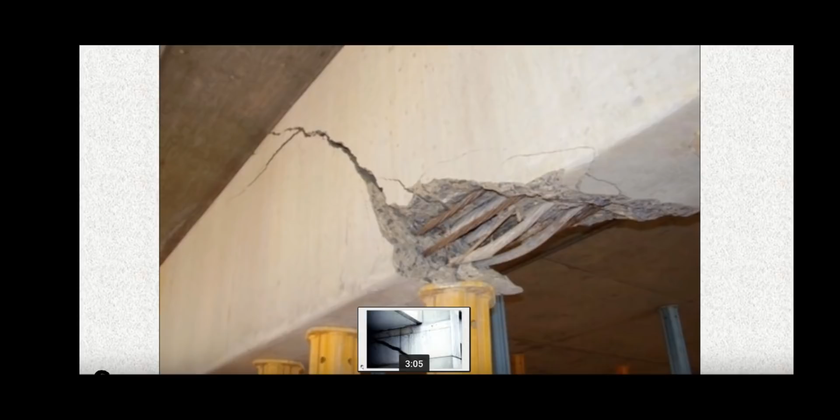I'm going to go forward a little bit. Look how beautiful this image is. Now, does this not look like, if you just pretend this is a load on top of the bridge, this would be the truss system of the FIU bridge, and this is solid, obviously. And this would be the pier, and this would be the 12 column, and that would be the 11 going here, and the rest. I'm sorry, the rest of the I-beam design, as they refer to it.

But you see where it breaks right here, falling away down, not pushing it off. Shear failure is in this plane. It could be in that plane if somebody was to push it back and this could not move. It would have to shear against these 2 members; they would be the shearing members at that point. So you can see it break away. This would be where it breaks away the deck.

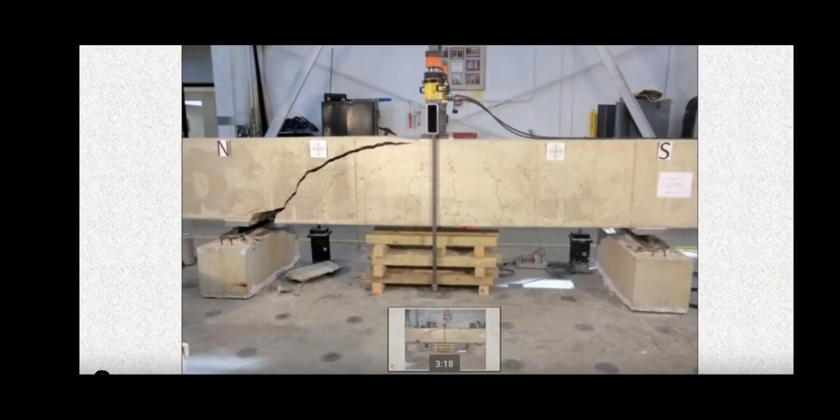Let's see if I can jump to the video. So he does a video here. Back it up. No video, just a shot. Here's his point loads. If this is the dead load of the structure, the bridge, and cribbing is here to help him pick this up after this fails. You don't want it on the floor to try to get it up. So this is just to limit the falling of this beam. Again, there's your load point here, and this would be the dead load of the structure, in this case the bridge, resisted by the pre- and post-tensioning of the cabling and some steel, minimum steel.

Everybody talks about it needs more steel, needs more steel. There is no room for more steel, is there? It's like a 1 foot thick deck. There is no more steel allotment. You can't have giant stirrups in there all the way up because of the way it's shaped. You can't get the stirrups up there. I think he has a stirrups video. Let me show you guys stirrups.

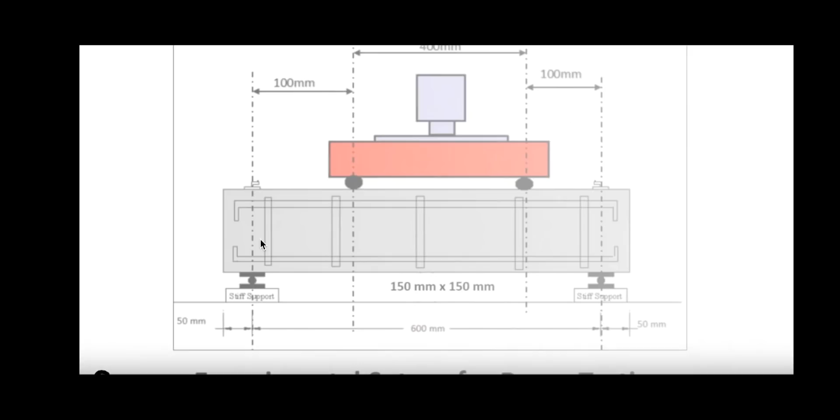Experiment setup for beam testing is what it says down below. You guys cannot see it; my screen recording is not large enough. So 100 millimeters, 400 millimeters, 100 millimeters. So it's not a big beam, but these are the stirrups. It would act like a stirrup if it was connected. Kind of cool. Check it out. Let me fast forward it. Experimental setup for beam testing. All right.

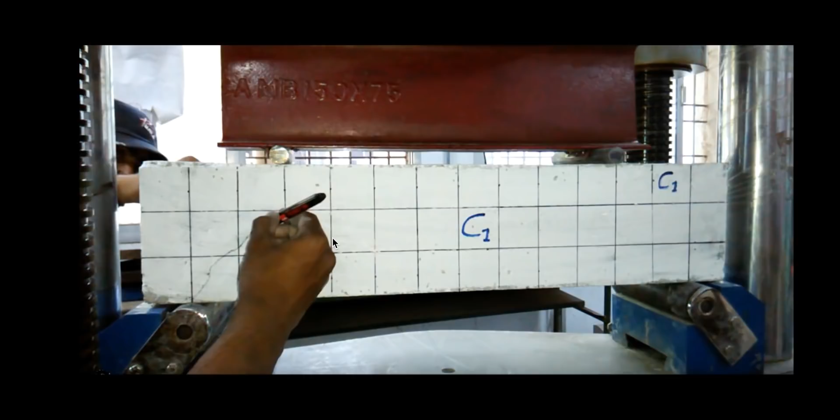So C1. They're going to mark the cracks right now. But what I want you to note, and I've been working on this very hard, diligently in the real world, finding locations before I do a video, but I'll give you a gist of it, is that when a structure is failing from shear, this is already a shear crack, it doesn't exhibit itself at the top that easily. This still looks pretty much in plane up top.

You'll see the cracks, which I really like his video doing this. It's the only one I could find doing this. You see it doesn't go all the way to the top, so you don't see it. That's that inverted V I talked to you guys about. If you can imagine it, this would be the open of the V, and that would be the point of the V. But look where it resolves itself. Right about there is where it transfers the load, and the stress expresses itself in the crack up to there.

And over on this side, it's like this. But it's a 45. See the 45? Remember I talked to you guys about loads, how they transfer on 45s. Well, I haven't found anybody talk about this in papers or anything else. But you see the 45, and you'll see that now, since this cracked first, all bets are off.

The load is now, once you have this crack, now the loads are transferring differently in this structure. So over here, if you were looking at the structure, you see these two and you go, huh, might be failing flexurally and not under shear if it was more in center line. But you might be thrown by it.

You don't see the cracks coming out this way because on this end of the structure it's already cracked first, and now the forces are redistributed differently and exhibiting in this format, as awesomely he shows with his penning.

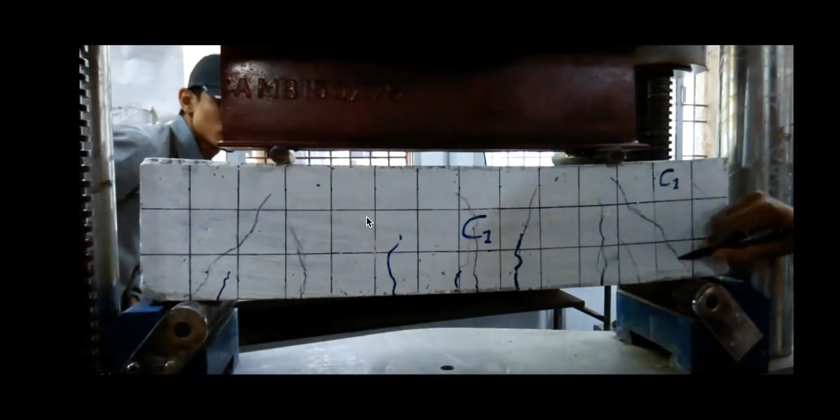And now the flexural part of this member is keeping this thing together. I would theorize that if he didn't have reinforcement across here, this would have already popped. This would already be on the ground. But look how far we got. This one looks like it went up a bit. Look how far we've gotten already, and it doesn't show it at the top.

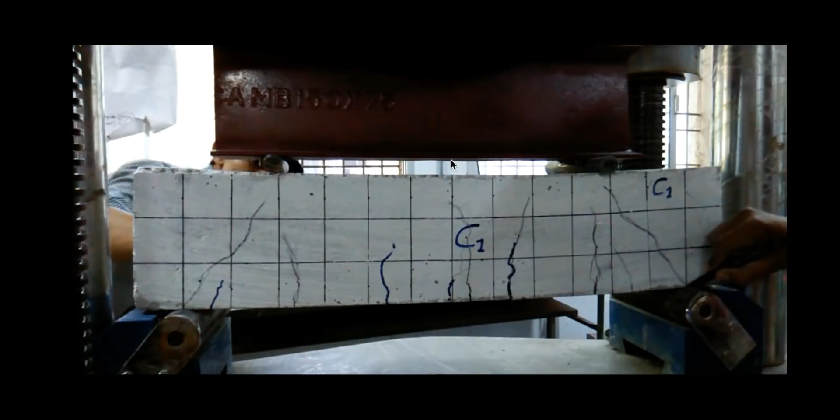It does show bending, but not all the way through. Now here we're coming just about to the top. It looks like we made the top over here. Interesting, the loads, I guess, no longer migrate down there. It found another path that went on the outside. That's interesting, but still approximately 45.

Now we look at this one, and you see it's developed further up. And what does it look like? Now it looks back like a shear again, back to 45. So you see how elusive it could be, but this one developed first. Once those forces are shown and they start developing, it's this far before you finally see the balance of the one to the left and the one to the right, what I'm calling shear force development. And here's your flexural development in the middle.

I love this stuff. And out here, we've got nothing. We've got some compression going on, some outward compression. It's now freed, though. What's holding it now is the steel. It could be some tension out here. I don't know what the steel looks like out here.

But what would stop it is the stirrups. Imagine that the stirrups are in line with this marker here, stopping it from pulling away, blowing out, because the reinforcement is now in tension in the diagonal format. Now we don't have diagonal format to protect it in a structure such as FIU, short of number 11 where we've got the post-tension bar to help it in that capacity. But it's not solid as this member is, where you get to pick any location.

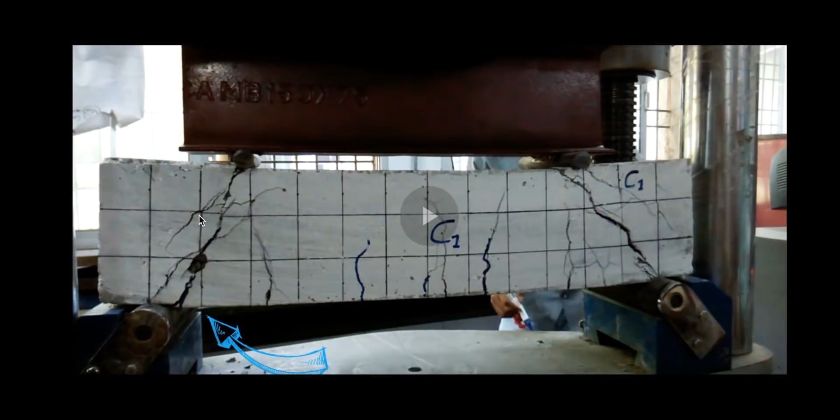And now we're getting it bowing out, bubbling out, expanding forward. But we're now no longer in plane. Just like the FIU bridge, where you can stick a tape measure behind it, now in the other direction, though. Just like that, we're starting to get that. Here we go. Here. Way beyond where it was in plane before.

And it's shooting out again. We're no longer in alignment. And you're getting your pieces breaking out. They're just no longer being able to hold on the reinforcement in there. I'd love to be able to see it. Maybe it's in there. Maybe it's right there too.

But now it's pushing down. The reinforcement is just pushing down on this, what's left of this concrete. Stirrups in here, I don't know. They would tie back up into there then and redirect, come back around full circle, if you will. That was

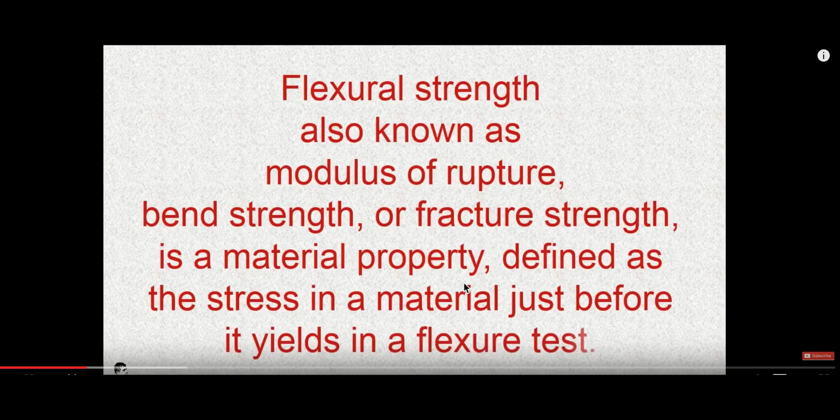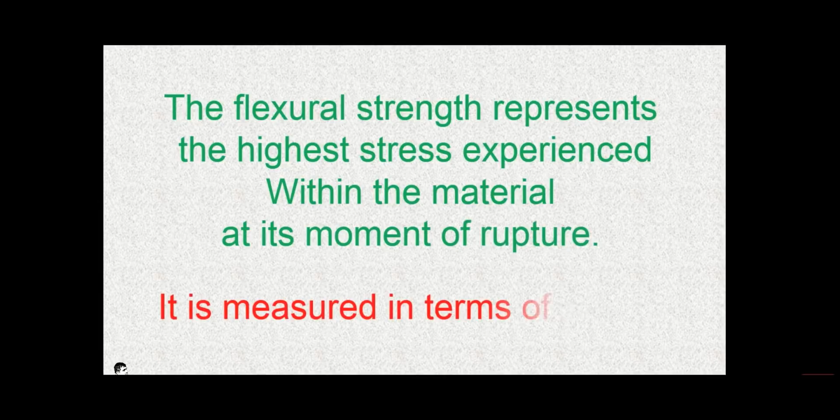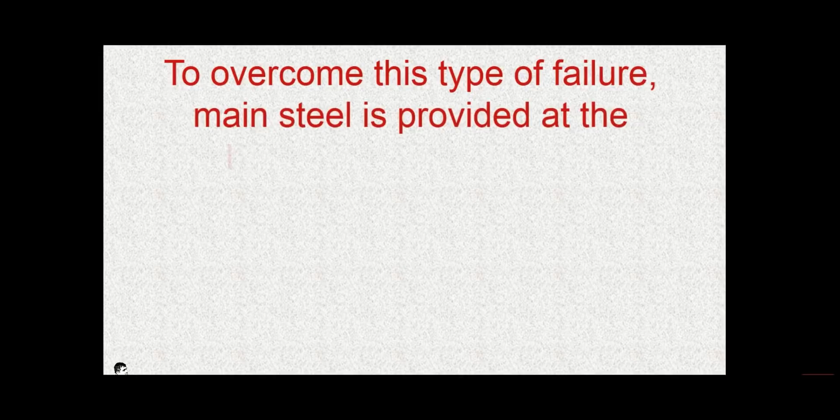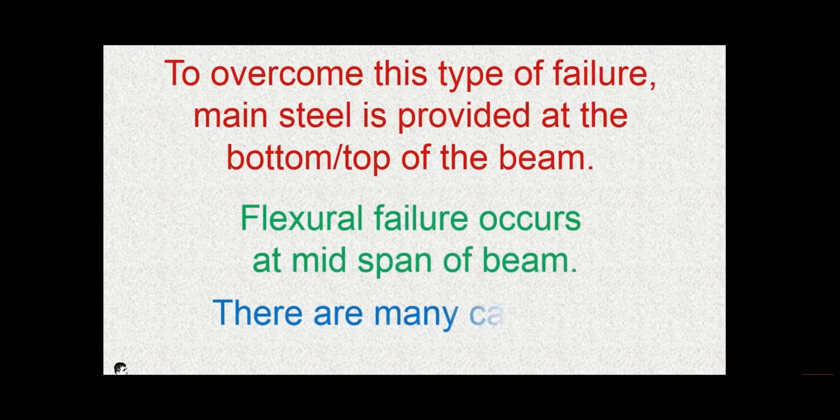The highest stress experienced within the material at its moment of rupture, it is measured in terms of stress. Okay? To overcome this type of failure, main steel is provided at the bottom and top of the beam. Flexural failure occurs at mid-span of beam. There are many causes of flexural failure. The flexural failure is governed by concrete crushing after yielding of the steel.

And I think he was referring to what I talked about with the compression of the concrete at the far right in that one video just now. And it has nowhere to go, right? The steel is doubling back. It's still holding on each side of the crack, and it's still bending, and it's just coming in contact with itself across from the crack, and now it's crushing. And I think this is what he refers to as crushing after yielding of the steel. And remember, on one side, it's now pulling, so it's in tension.

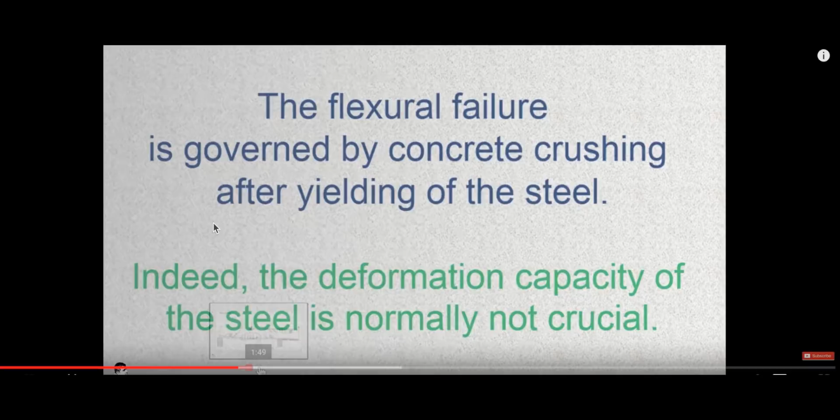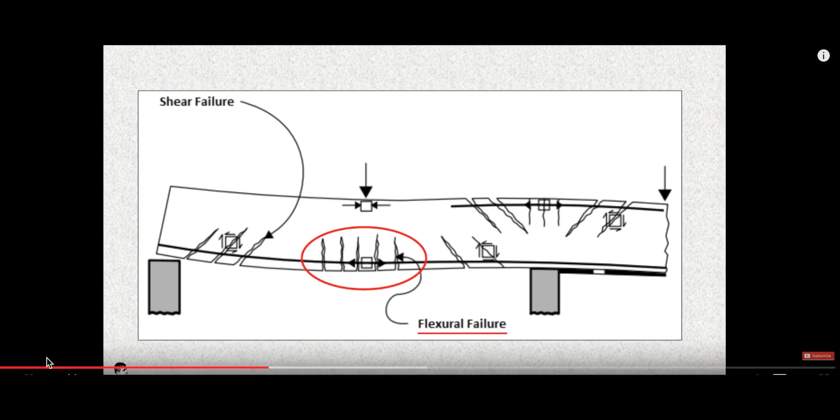Fast forwarding. What we got here? Flexural failure, right? Shear failure. Here's the load, and here's the load. Okay, so here are the two load points. Okay. See the uplift here? See the negative load right here? As it goes down, it creates a negative load and a point load here, and not here.

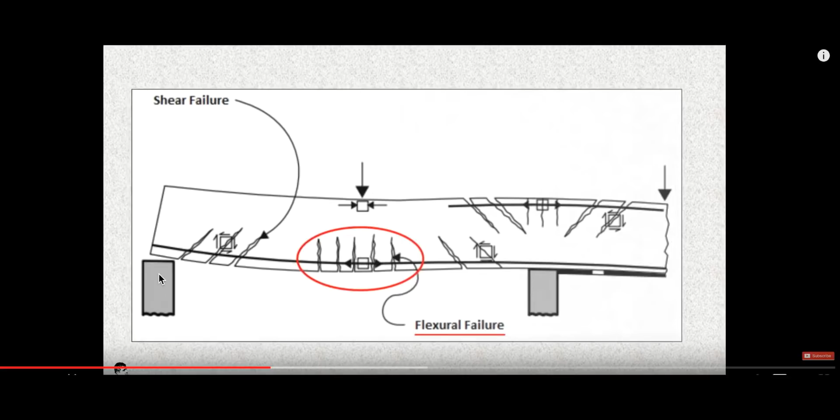This will be the dead load of what I call the FIU bridge in the center, creating that negative load, but they never talk about it coming off of here. But perhaps Denney Pate's intention was to shim it under here to try to resolve some of that negative load. So there it is. These are more in line with the center of the span. And that's a roll and a roll pin. Okay.

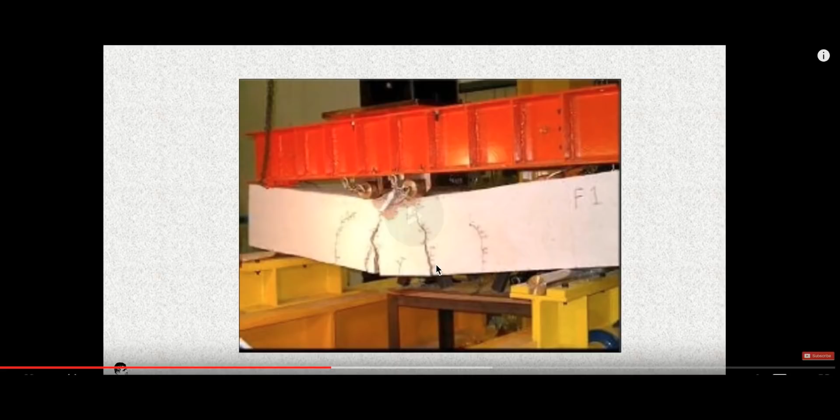Wish I could see more of that one, but cool. And here's another video of that. Here's your flexural. It is a point load, right? It's a plate. But I would love to see cracks off of here. I would love to see this go all the way to failure, and I'd love to see it from the start. We already saw one from the start. I would guess, though, how this developed was...

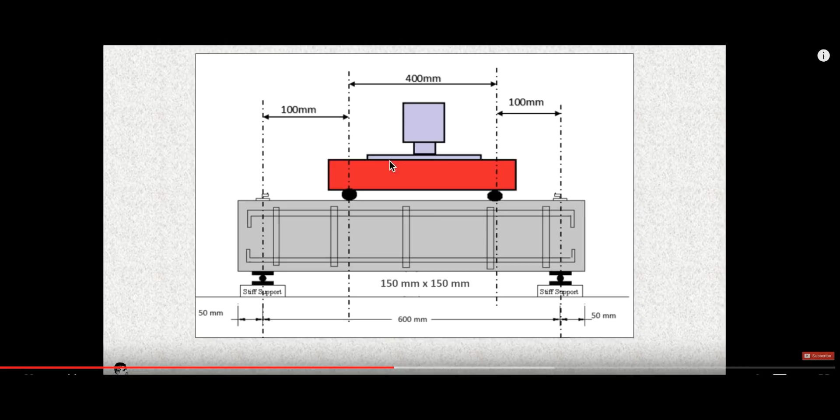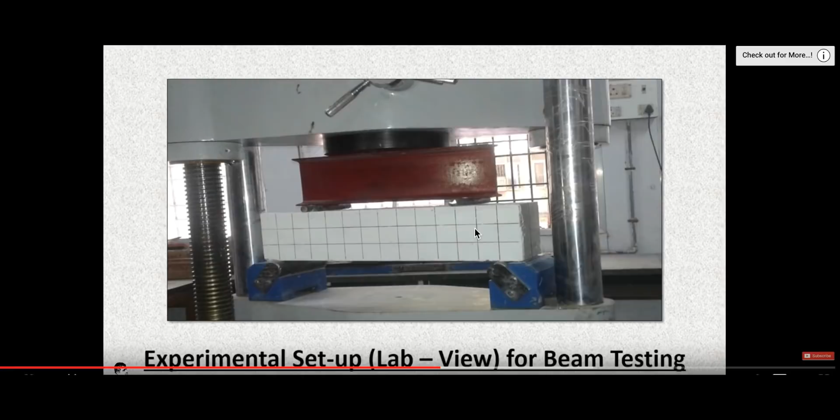We're next going to look at his flexural demonstration of a different one. Don't get confused with this last image. This is a new steel too, right? I don't know what the steel looks like in there. It looks similar to the previous model, and I don't think it is the same. Well, you see there's no F1. I think he had F1 written on these. There's no F1 on these.

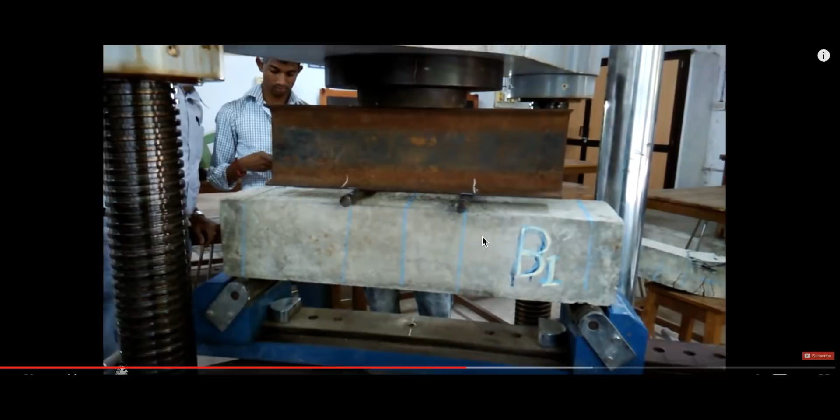Kind of cool. He's predicting, I think, the path with the blue marking, or whatever color you see it as. But I would say it would crack off here at 45, right? Here and here. And there's the point loads, roller. Appears to be roller. Now he's applying the loads. Well, they're applying the loads. So we've got to bear with it. We're gonna let this play out.

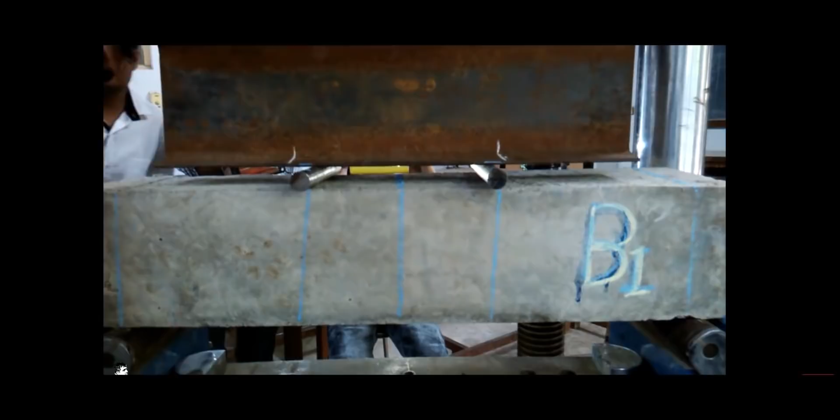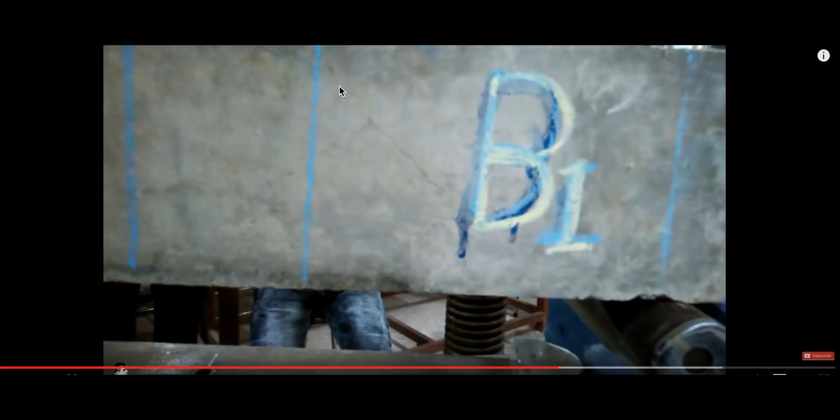So this is the flexural. Flexural failure reinforcement concrete beam flexural strength concrete laboratory test. That's on the YouTube channel. This is where the predicted path would be, apparently, where he's predicting the path to be, or the students are. And there we have my 45-degree angle. So even though it's set up to fail in flexural, I think this might have been shear first.

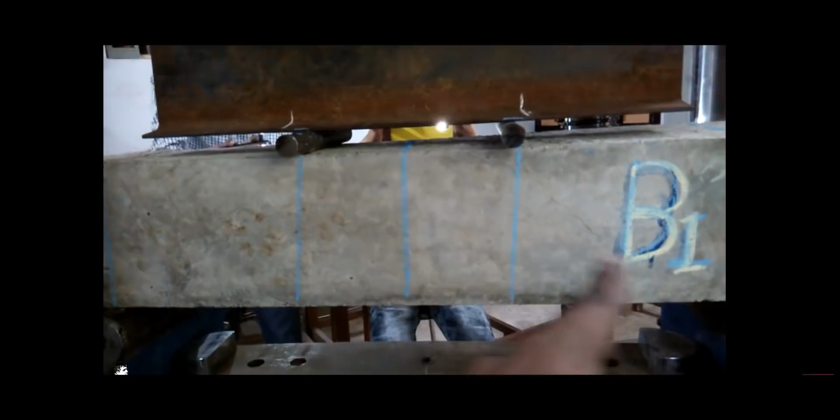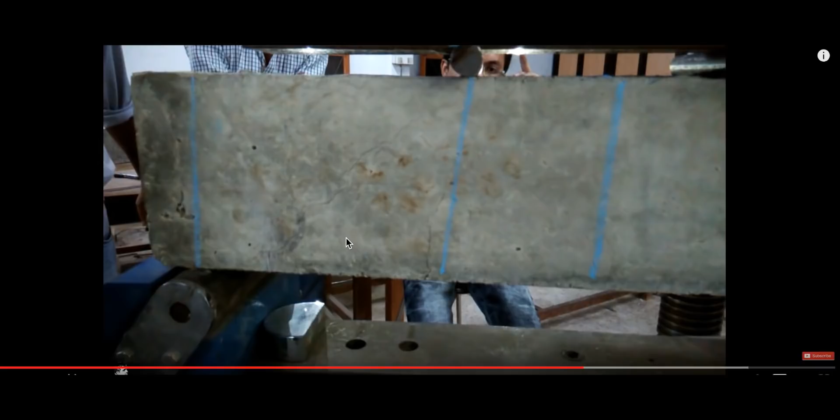Oh, did he just point to the left too? And then up in the middle. Cool. Here it is right there. And you can go through the video yourself. And there's this crack. And there's this one. This is his flexural one. So he probably doesn't have stirrups in here. It's going to fail faster without the stirrups and some reinforcement to cross there, so he can predict it, to make it happen without it failing in shear first and just brutally cracking onto the ground floor, whatever the setup is.

Cool. There it is again. There's that one. Let's let this roll out. It's only another minute. And there we go. Inbound of the support and inbound of the support, symmetrical. Again, we don't see it at the top though. You don't see it happening at the top first. And this looks like it's in plane. You wouldn't even think it was out of plane. In other words, no surface cracks are developing. They're not showing that, but that's the way I see it. Oh, perfect. Look at that one. Right up where they predicted.

He just balanced the span, loaded it, and with no stirrups, I think you would get this result. Just some longitudinal steel. And now this side would be starting to compress against itself. That gap, it looks fully developed. This is never going to compress against itself besides up here maybe. Well, I won't say never, but right about here, this will start acting on itself. But will this start opening up next? This is opened up this far. Will it now get symmetry and open the other side? This is the other side I'm referring to.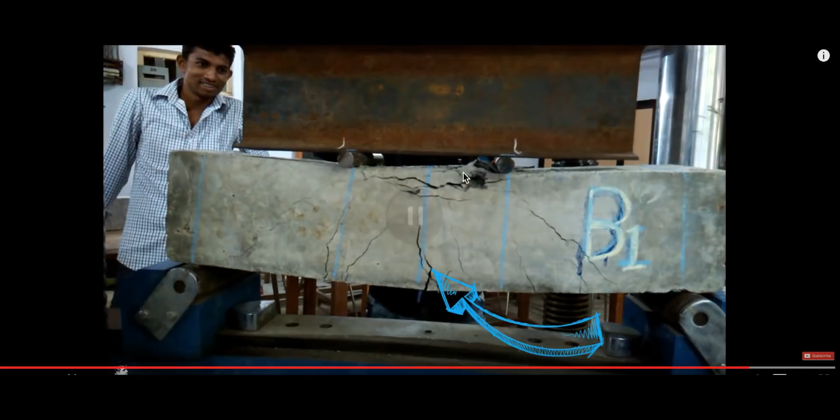Oh, we're getting compression up here. Now it's starting to break through. Wow. Beautiful stuff. So we're getting this bow that doesn't seem like much but is obviously present, and it's compressing against itself. Beautiful. And maybe the rebar is now reacting, and there it pops. Look at that opening up. It still hasn't developed fully. Well, if it fails fully, then it's developed fully, isn't it? I was hoping this would open up.